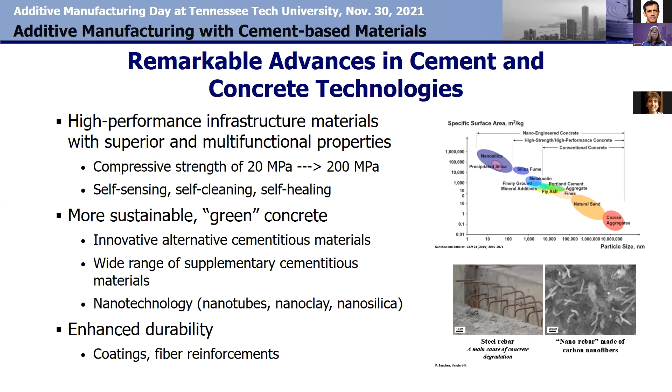So the question is: is 3D printing the next revolution for cement-based materials and the construction industry? 3D printing has received significant interest from the construction industry in the last few years. 3D printing eliminates the need for formwork. Molding and formwork represent 35 to 60% of the cost of a concrete structure. So 3D printing can reduce construction cost and time. It also eliminates time spent on rebar placement and inspection, and in turn can increase productivity and safety. And of course, it provides flexibility in construction and architectural freedom that cannot be obtained with traditional casting.

In addition, 3D printing also provides a more efficient use of materials. You can place material only where you need it, and that eliminates waste as well. So 3D printing can significantly reduce the large environmental footprint that is associated with construction. So these are the benefits for the construction industry.

But there is another aspect that is probably less evaluated, which is the new paradigm 3D printing provides for cement-based materials and design approaches. 3D printing has created a new opportunity for concrete to optimize the binder and to use other types of binders and local materials.

So 3D printing provides an opportunity for controlling locally the microstructure and the interface between the reinforcement and the materials, and also to realize a hierarchy of structures and patterns with much greater control over a broader range of length scales. So 3D printing provides the ability to design 3D printed elements that have tunable and unique or enhanced properties that are not achievable with current casting.

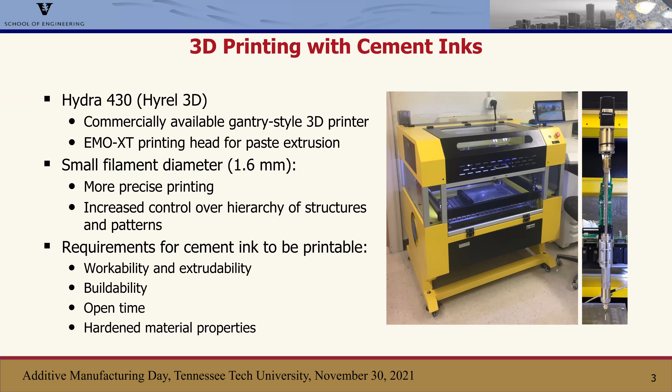While there are some downsides of this, the primary advantage is that it gives us more precise control over the printing process, allowing us to have more careful control over what material is placed where, for closer control of the hierarchy of the structures and the patterns that we're printing, so that we can use that information to more closely develop novel materials and printing processes.

I'm not going to go into too much detail about this because I know Dr. Biernacki's students have several talks talking about this, but it's important to understand that you can't just 3D print with any old cementitious material. It's important for it to be workable enough that you can use it to form filaments, and buildable enough that it can hold its own weight without deformation of successive layers, while also having enough open time so that it is in the fresh state long enough for you to extrude your structure. And then once it's printed, it also has to have adequate hardened material properties for whatever application is being used in the industry.

There are a couple considerations that are important to take into account when you're extruding a cementitious material, particularly with the propensity for it to segregate during the extrusion pressure. So there's a couple dynamic processes that occur during this process.

Water can be driven out of the extruded filament into a lubrication layer to facilitate plug flow, which can change the availability of water within the filament, while simultaneously you can be driving water from the bulk cement paste into the filament as it's printing, which can have a converse increase of the local water availability within an extruded filament.

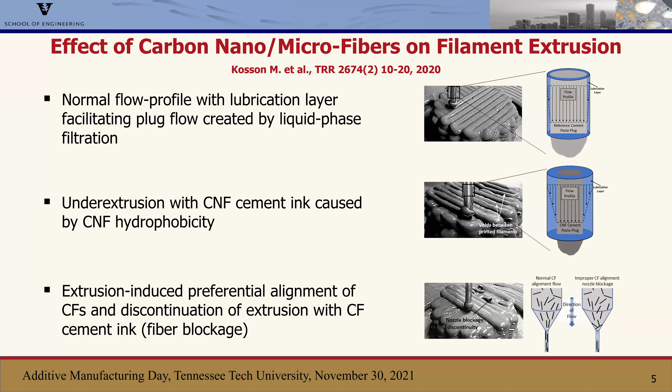When we were printing with the carbon microfibers, we saw that they preferentially extruded and aligned in the direction of extrusion, which, when we printed in a rectilinear pattern where every layer was offset 90 degrees from the previous layer, produced an effect where you had an alternating directionality of the printing pattern.

Interestingly, other than that, as we've tried to study the interface, there's no other obvious indicator that an interface is being crossed here. So there are only very minimal microstructural changes associated with the interface between these printed filaments.

Another important thing to consider was that we saw a non-uniform dispersion of the fibers throughout the filaments, and it's thought that as these fibers align or fail to align - but not quite enough to cause a blockage - you can have fibers that have a tendency to come out all at once.

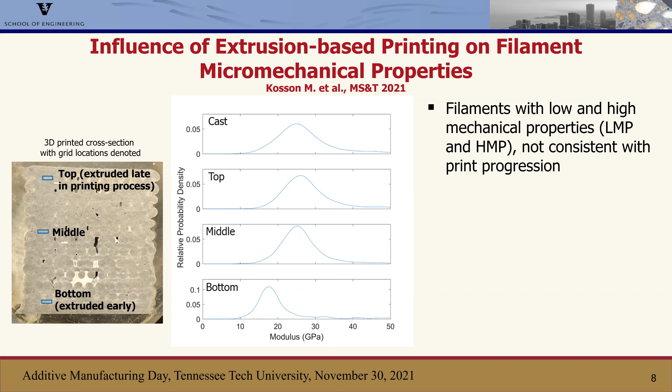So what we found is when we casted samples with different water to cement ratios, we got a similar effect, whereas a higher water to cement ratio corresponds to a reduction in the mechanical properties of the filaments as measured by nanoindentation. For the low mechanical property filaments, we get this similar effect to casting with a higher water to cement ratio, whereas with the high mechanical property filaments, we're getting something more similar to casting at a lower water to cement ratio.

That suggests that what we're seeing as we extrude is a big change in the availability of the water within the structures, and that's changing the mechanical properties of those filaments once they've been hardened.

As far as the effect of this on the microstructure, what we found is that there aren't big visible changes in the microstructure between these low mechanical property filaments and the high mechanical property filaments. That suggests that most of the changes are more at the nanoscale, in the pore structure, and in the packing density of the individual hydration products, as opposed to changes within the hydration reactions themselves.

We do see, however, some evidence of changes in the dissolution depending on the chemistry of the unhydrated particles. I'm not going to get too deep into that for this talk.

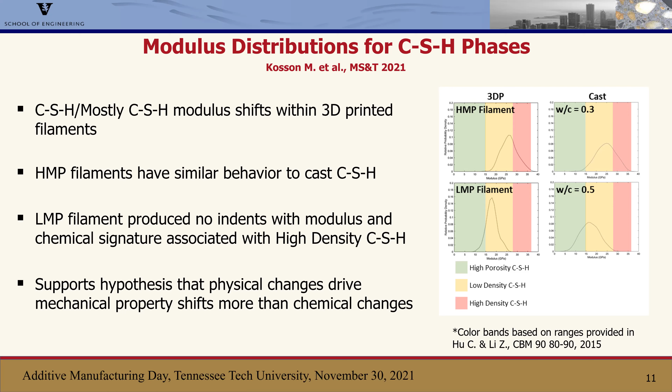So in conclusion, there are some very important things to take into account when printing with a small filament diameter, including that liquid phase filtration can change your local water availability at the extrusion point, and that these changes are dynamic and can change both the mechanical and chemical behavior of your printed filaments at multiple scales.

The interactions between the paste constituents during extrusion also need to be considered, as we saw with the carbon nanofiber hydrophobicity leading to under extrusion, and with the carbon microfibers aligning with the direction of the print, as well as water being transported through our filaments during printing.

What I want to leave you on is the thought that we can use these interactions to tune the mechanical properties of our structures for the specific application that we're using them for.

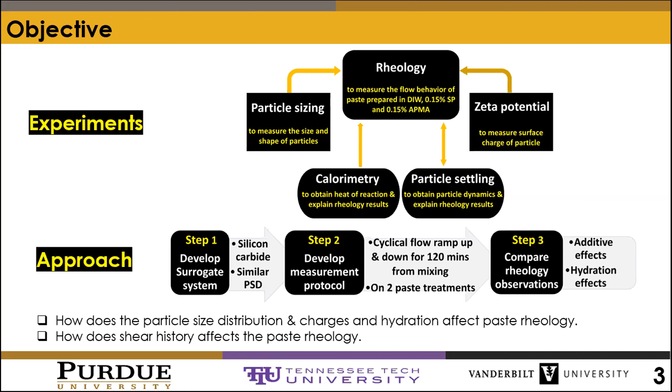I want to know how much of a factor hydration is in the first 120 minutes under shear conditions. So I'm trying to understand the effect of additives on rheology, and how much of rheology under flow conditions is contributed by hydration and how much is particulate driven.

So now let's discuss rheology even further. One way to study the flow of cement paste is through rotational rheometry, where a small thin film of material is placed between two parallel plates, and one of the plates is spun, usually the upper one. When you do that, you generate a flow curve, the plot of shear stress against shear rate. For a Newtonian fluid, regardless of whether one is increasing or decreasing that spinning rate, that fluid behaves exactly the same along a straight line.

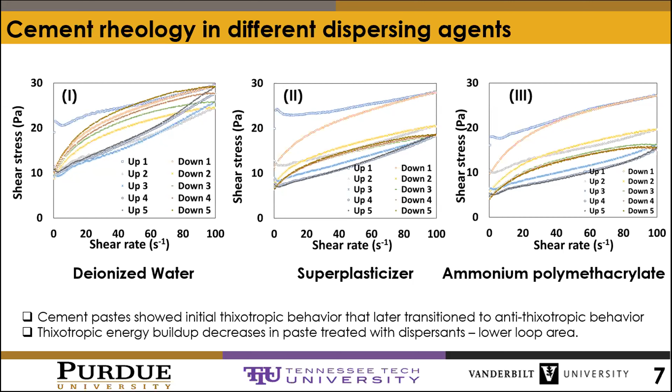So how does the particle size distribution and zeta potential measurement impact rheology? Dispersing agents do two things: modify the particle surface charges and the apparent particle size distribution. In fact, changing both in different directions may have competing impacts on rheology.

Secondly, while ammonium polymethacrylate clearly changes the surface charge in a direction that should favor deflocculation, in fact it doesn't, and the apparent particle size increases by more than double. Nonetheless, the rheology suggests that ammonium polymethacrylate has a lubricating effect, apparently. Once the paste begins to be sheared, it behaves as a flocculated material and transitions to anti-thixotropy.

Here I briefly compare the rheology of cement against that of silicon carbide. In the first 45 minutes of mixing, while cement paste transits from thixotropy to antithixotropy, silicon carbide paste transits from antithixotropy to an unstable mixed mode of thixotropic and antithixotropic behavior, attributed to their different initial conditions of structuration immediately after mixing. Also, results suggest that flow curves for cement paste in the ammonium polymethacrylate, wherein hydration is occurring, evolve to a similar value of shear stress when compared to the silicon carbide.

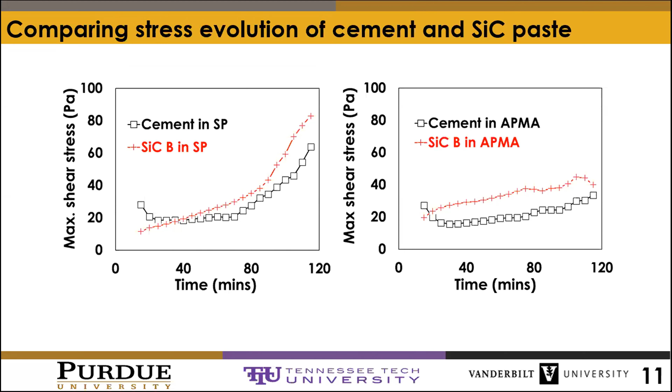Here is the maximum shear stress attained in each cycle loop against time for both pastes in the two liquid treatments. We see that both pastes evolve to similar shear stress values.

So what are the broad conclusions to be made in this study? The stable rheological condition of Portland cement paste under shear is antithixotropic, not thixotropic.

With the comparable rheology observation for non-reactive silicon carbide paste and reactive cement paste, it is difficult to suggest that changes in cement flow rheology in the first 120 minutes after mixing are the effect of hydration rather than particulate interaction.

And finally, although certain additives in dilute systems significantly alter the apparent particle size distribution of particles in suspension, that observation alone cannot be used to produce a predictable rheological outcome. Thank you.

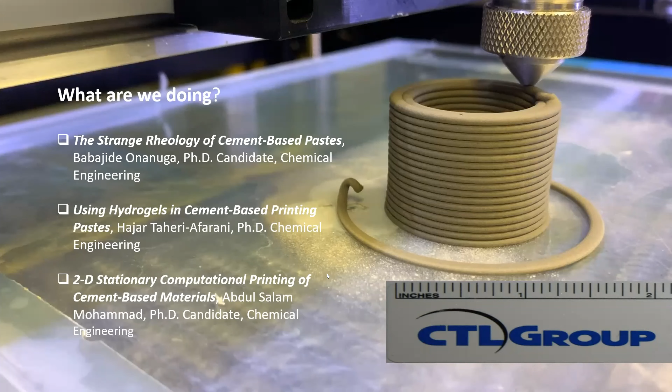Habitat for Humanity reports that 1.6 billion people live without adequate housing. So might additive manufacturing be a solution? The answer is yes. Researchers in the United States and abroad are actively working on additive manufacturing technology that might soon make it possible to house the world's growing population with affordable, adequate housing.

But yet, there are a number of critical hurdles. The material must be extrudable. It should be able to retain its shape once deposited. The deposited layers should not collapse under the load of subsequent layers, and a good bond strength between the layers must be ensured for better hardened properties.

Our results show that unadmixed cement paste is simply not printable. So what's the solution? The answer is additives or admixtures that can be added to the cement paste to make it printable.

We are searching for effective additives, and there are lots of candidates. There are traditional admixtures like superplasticizers or off-the-shelf viscosity modifying agents. People also use fillers like clays and limestones, and supplementary cementitious materials like ash, slag, and silica fume. There are also less traditional admixtures such as hydrogel forming polymers.

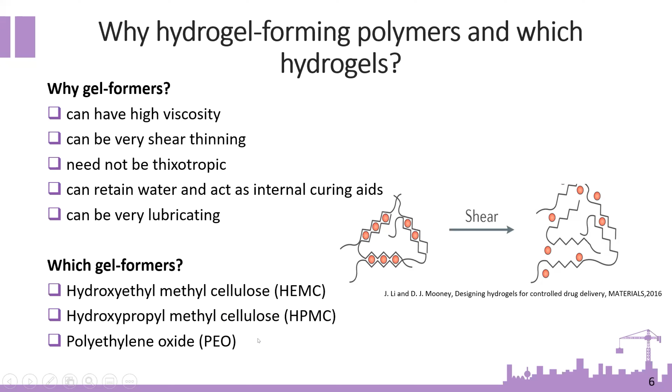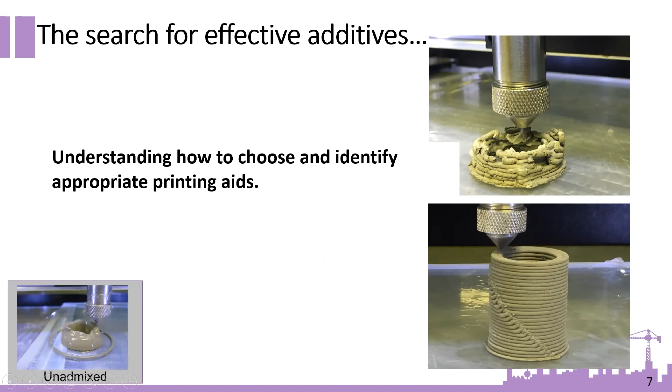Our experimental design included a 4x4x3 factorial design. We varied the gel to cement ratio, and also varied gel percent, and printed a benchmark hollow cylinder object based on 3 hydrogel forming polymers.

The viscosity improved and increased as we increased the gel concentration. We also performed oscillatory measurements of the hydrogels.

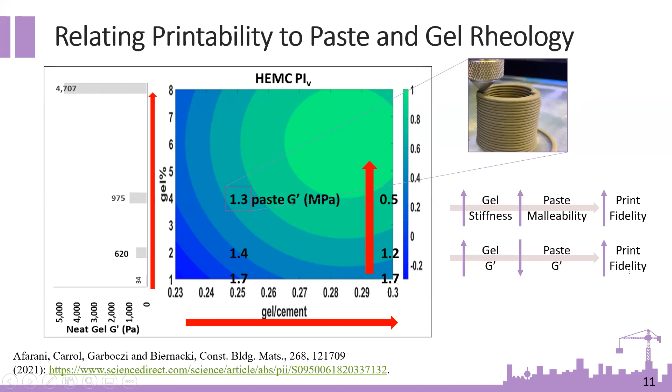So all in all, hydrogel forming polymers were found to transform unprintable neat cement paste into a highly robust printing media. The highest performing printing paste had malleable characteristics and retained rheologically solid-like behavior. Printability increased proportionally with increase in neat gel storage modulus, but was inversely proportional to the paste storage modulus. By increasing the gel concentration, the stiffness of the gel increased, which increased paste malleability, and ultimately print fidelity increased. Thank you for your presentation.

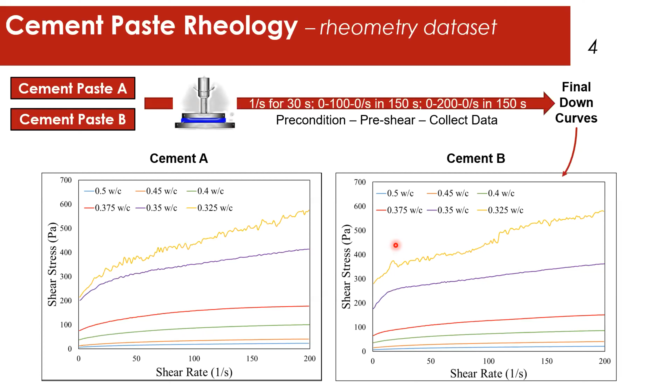I then fit that data set with either a Bingham model or a Herschel-Bulkley model, and I get beautiful fits with the Herschel-Bulkley model for most cases, except for maybe this one case where it was a rather stiff paste and it turned out to be Bingham rather than Herschel-Bulkley.

That being said, I collect these experimental data in triplicate, and I determine the yield stress, plastic viscosity, and the fit exponent for both cement paste A and B.

Bottom line is, when I plot yield stress versus water to cement ratio, I see these two beautiful curves with the aging effect. If we age for 30 minutes, the material is rather stiffer than the material that is not aged. However, for water to cement ratio above 0.4, there is really no effect of aging for a period of at least 30 minutes.

So what I've already done is make the paste, do the flow rheology, and extract the yield stress, plastic viscosity, and the dimensionless fit parameter for the Herschel-Bulkley model. But to understand how the rheology of cement paste works, a good test is to do a slump flow test.

The slump cone is a simple device. It is conical, filled with the cement paste, and the cone is lifted such that the cement paste slumps under gravity.

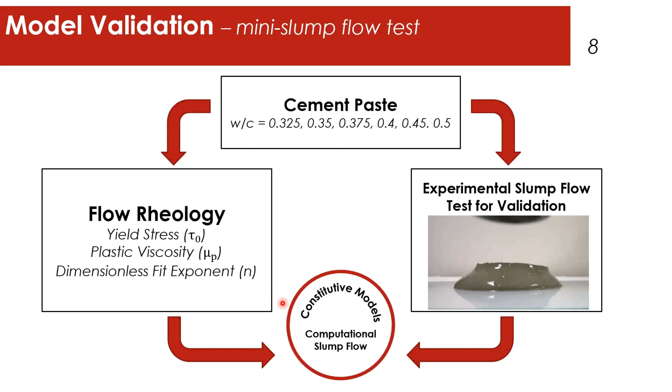Here is the comparison of experimental and simulation results of the mini slump flow test, from 0.325 water to cement ratio all the way up to 0.5, that are in good agreement with the experimental results.

Now I need to compare the 3D printed object to see if I can actually predict the morphology of the printed objects, instead of just the slump cone.

So I prepared our paste, again both paste A and B, and I printed an object that is a double wall hollow cylinder. On the other pathway, I'm doing 2D stationary computational printing, and then I'm going to bring them together for comparative analysis.

These are the actual objects that I printed, which are very small, on the order of 27 millimeters tall by 36 millimeters in diameter.

I show a range of objects here from 0.3 to 0.375 water to cement ratio, some printed and some collapsed in between. If I go to water to cement ratio as high as 0.4 to 0.5, the cement paste slumps completely and it won't print at all.

That being said, the question is how can I move from modeling a single gob of material to actually modeling printing? So imagine you can only see what happens in this plane AA, which is just slicing through some bit of space where the printer is going to pass periodically every now and then.

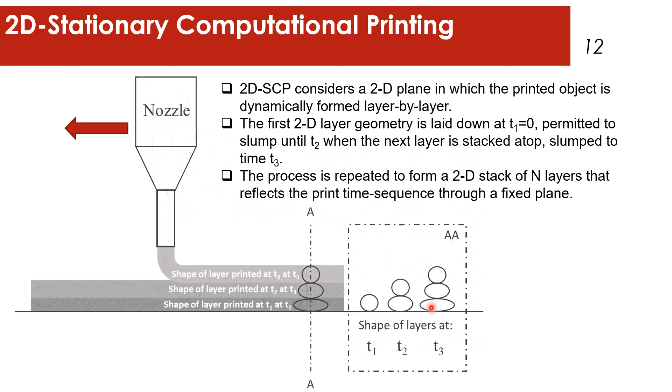At time T2, the second layer deposits such that at T3 minus T2, not only will the upper layer slump on itself, but the bottom layer will slump under the weight of the upper layer. At time T3, the printer passes again and deposits the third layer, and so on.

Now I have prepared a video that shows how this happens computationally. What I'm not doing here is piling up a bunch of layers at time t equals 0 and then slumping all of them together. That's not what this is.

So these are the stack of layers that are going to print a double wall, because we are printing a double wall hollow cylinder. The printer is passing the outer layer and the inner layer, and the material is wicking and slumping into it.

I selected a particular object here that will fail at some point, because I wanted you to see that this 2D technique, although two-dimensional and computationally very efficient, can actually capture the dynamics of a failure. In a bit, you will see a collapse of the wall.

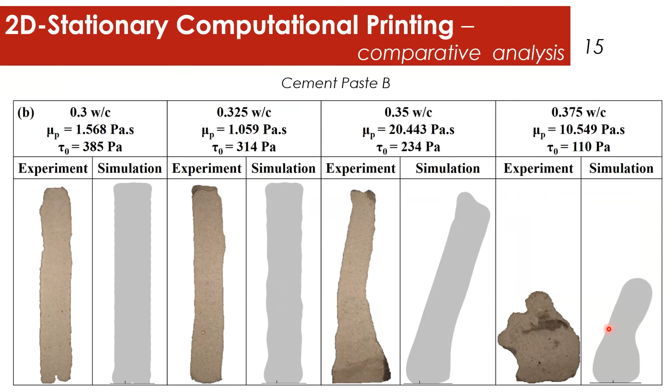So here is the collapse of the wall. Here you see the comparison of cut cross section of actual printed object and computationally printed object, which are in good agreement for cement paste A, as well as for cement paste B. At high water to cement ratio, computationally printed object also predicted the collapse or failure similar to actual printed object.

Now to establish a more quantitative comparison between the model-based prints and actual printed objects, a 2D cross-section based print fidelity index was calculated by overlapping the actual printed object or computationally printed object with the idealized object. So this is an idealized object and this is a computationally printed object.

So first I align the basal plane and then I align the axial centroid. I penalized for anything that is outside the idealized object and anything that is not covered inside the idealized object, and measured the print fidelity index from 0 to 1, where 0 is worst or not printed at all and 1 is the perfect object that matches the idealized object.

So here I plotted the print index of actual printed object on the yield stress versus water to cement ratio graph. And you see that as the water to cement ratio decreases, the yield stress increases and the printability increases. Thus, the printability moves from low print fidelity domain to a high print fidelity domain as the paste water to cement ratio decreases and the yield stress increases.

Now, if I plot the model and actual print index 1-on-1, I see a strong near linear relation. And if I put the yield stress on it, I see that the good printing outcome was observed at the printability index of 0.7 or greater. So this shows that at printability index of 0.7 or greater, that is a yield stress of about greater than or equal to 237 Pascal is required to produce good printing outcomes.

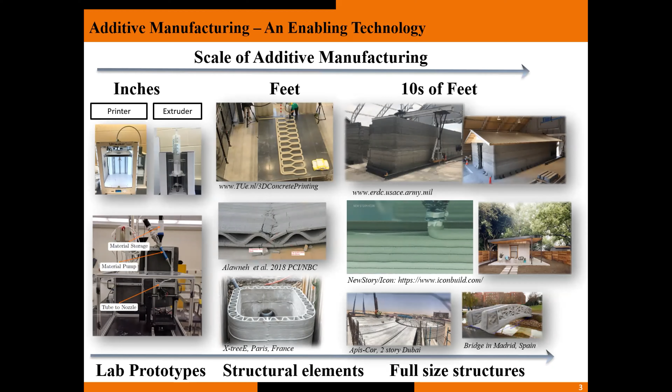So about 2016, as mentioned by Professor Sanchez, collaborative research started together with Tennessee Tech and Vanderbilt University, Professor Sanchez and Professor Biernacki, in which we touched on a number of different topics. As you know, additive manufacturing has been around now for a while, and it exists across multiple scales. Early on at the smaller scale and prototyping, and later on towards more structural elements and components, and then more recently towards full-size structures for home building, but also for renewable energies.

But there are several aspects that it's a multidisciplinary, multifaceted topic. And so on one side, we worked on the design opportunities, ability to print materials in different shapes and forms, whether in terms of exterior topologies or interior architectures, enables you to achieve compliant mechanisms like that. But there are also challenges, as was discussed by Michael earlier, in terms of the heterogeneities that results from these layer interfaces. So we looked at some of the microstructural aspects.

In terms of materials rheology, the past two presentations covered interesting work on the rheological challenges of formulating materials and failures. And on the fracture side, once you have a structure, then you have to worry about the fracture and damage mechanisms in these systems. So early on, we focused on design opportunities, combining really materials and space. In a monolithic material, you're dealing with inherent properties of the material.

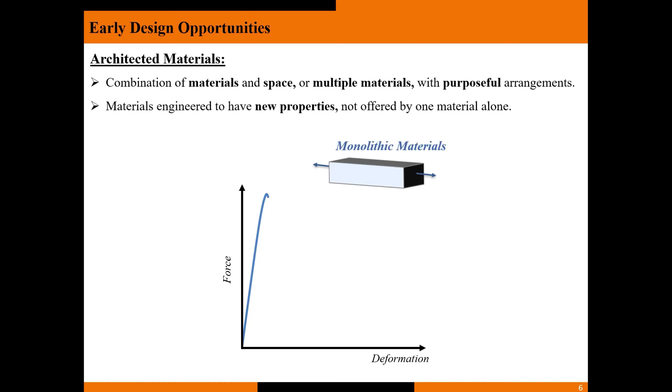You apply the force in a brittle system, the material fails. In an architected material, you have the ability to tune the response by tuning the architecture and perhaps improve some of the properties. So we looked into a number of different architectures, but more specifically I'm going to briefly talk about these Bouligand and helical architectures, in which as you deposit the materials in a layer by layer fashion, you continue to rotate the orientation.

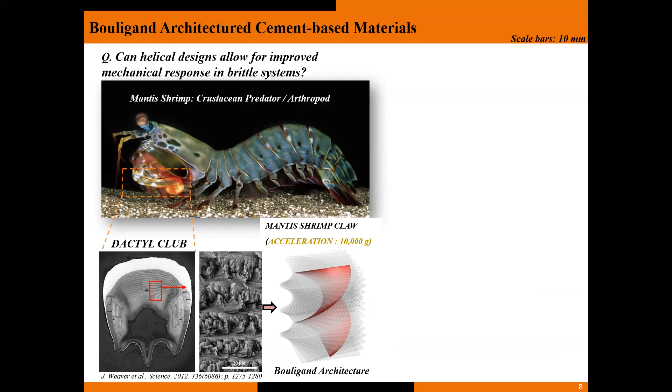Inspired by mantis shrimp, and the dactyl club more specifically, we looked into the role of pitch angle, or the rotation angle at which you orient the filaments in the subsequent layers, to see if we can investigate the design parameters, and can we fabricate them, and can we characterize them in terms of their tensile properties.

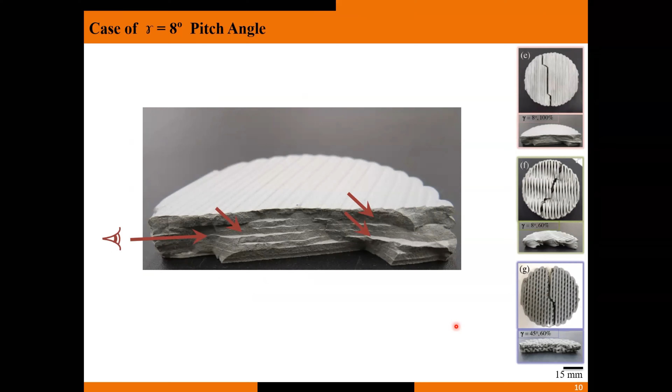So if you look at this structure, this element that has an 8-degree pitch angle, in this orientation what you find is that there are two toughening mechanisms that contributed to improve toughness in these solid systems, one of which is crack deflection at the interface and subsequent interfacial cracking. There was also an overall crack twisting, which is challenging to trigger in a brittle system, that we also observed.

So together we inferred that controlling the architecture and tapping on the challenge of weakening interface, you could combine them together to improve material properties.

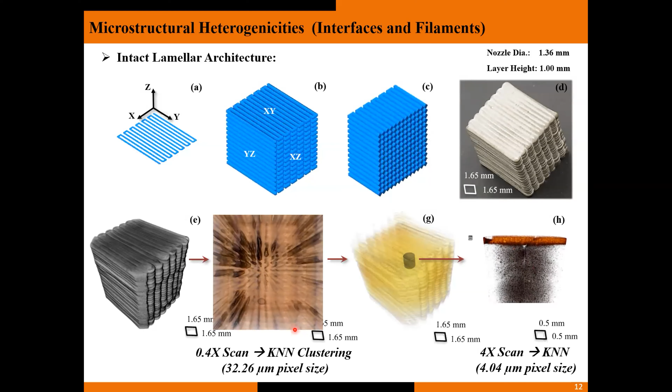In terms of going back to the microstructural heterogeneities, we looked into the microstructure of 3D printed cement paste at two different scales, at about 30 and 4 micron resolution. What we found was that there are macropores that happen throughout the printing process due to inconsistency, but there are also microchannels that are essentially trapped air in between the filaments.

There are two other discoveries that we had, in terms of filament rearrangements from a straight path, but also these bright regions, which later we found through a smaller scale characterization are nothing but accumulation of higher degrees of unhydrated cement grains near the pores, near the microchannels.

And so we clearly understood there is a homogeneous core versus a porous interface. So we looked into a smaller scale resolution, and what we found was that these microchannels are actually connected to one another in micropores, which was evidence for the presence of a weak interface.

And then we also noticed the rearrangement from some type of a diamond shape microchannel to a triangular shape, which is visible in the video.

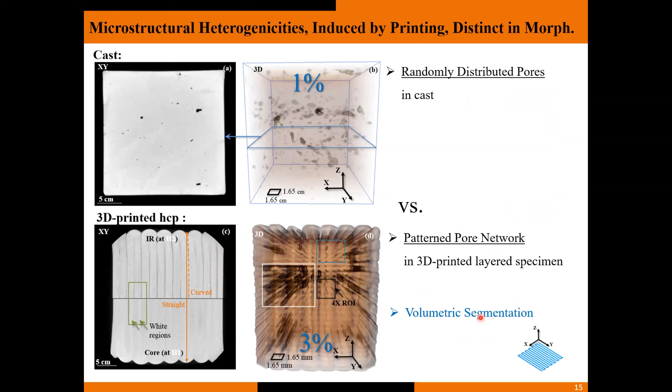So we later quantified these using a method called KNN clustering, and compared them to the reference cast. The 3D printed samples typically not only had higher degrees of porosity volumetrically, but when we did the segmentation we noticed that the arrangement or the morphologies are also fundamentally different.

As you can see here, the porosity induced by printing is distinct in the 3D printed samples. We have macropores, microchannels, and micropores, whereas in the cast case you have a continuous spectrum of porosity.

Then we focus on the damage mechanisms in these samples. In cast, there was no distinct crack pattern, just localization of a crack in the form of a shear cone, as opposed to a helical architecture, where we observed numerous microcracking at the interface and a helical exterior crack pattern.

So in other words, we were able to distribute the microcracking similar to those we observed in the flexural test, but here we're looking into compression, which we later found helped also improve the toughness of the material, the intrinsic toughness of the material, compared to the cast counterparts.

The graph right here is comparing the area under the curve between the cast and the Bouligand architectures.

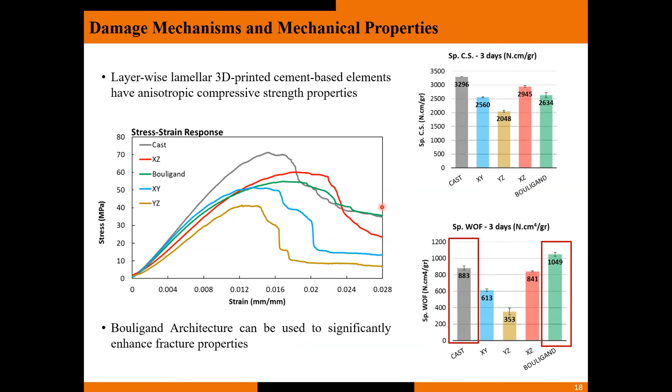The last part of the talk I would like to focus on is the rheology and buildability. Much of that was broadly discussed in the past two presentations. There are two main failure mechanisms with 3D printing of soft materials: buckling at the lower layers, yielding at the lower layers, as opposed to buckling in the top layers.

What happens is that from accumulation of geometrical imperfections, as was shown in the previous work, you typically end up with additional bending moments and accumulation of eccentricity, which then leads to local buckling and then global buckling. The question is, which rheological property is responsible for buckling specifically?

You first have to overcome extrudability, then you have to overcome the yielding at the lower layers. Once you're able to print an object, buckling is typically the common failure mechanism. So it's important to identify what rheological properties need to be controlled.

For that, we looked into the correlations of buildability of hollow cylinders with different rheological properties. We found that all three shear moduli associated with elastic properties or stiffness, G, G star, and G prime, demonstrated a stronger correlation with buildability as opposed to yield stress and G double prime. In other words, buckling in 3D printed soft materials is mainly dependent upon stiffness.

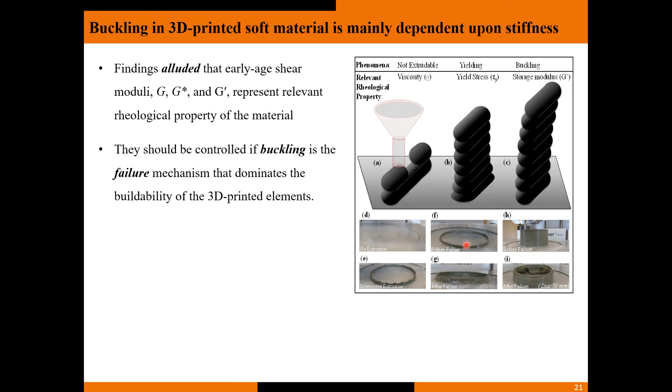As you can see here, viscosity essentially controls the ability to extrude. Yielding controls the ability to avoid yielding failure. Once you build up, you really should be looking into the storage modulus or complex modulus to control buckling.

Although these properties are interrelated, it's an important distinction as we scale up the processes in construction as a means to tune the chemical characteristics of surfactants and other chemical admixtures specifically for 3D printing.

We also looked at an isosceles triangle as a means to come up with a quantitative way to assess the deflection of single filaments. The test helped us look at the ability to span over varied length and helped characterize the amount of deformation.

In a neat cement paste as opposed to a cement paste with high range water reducing admixtures and viscosity modifying admixtures, which were all quantified using micro CT.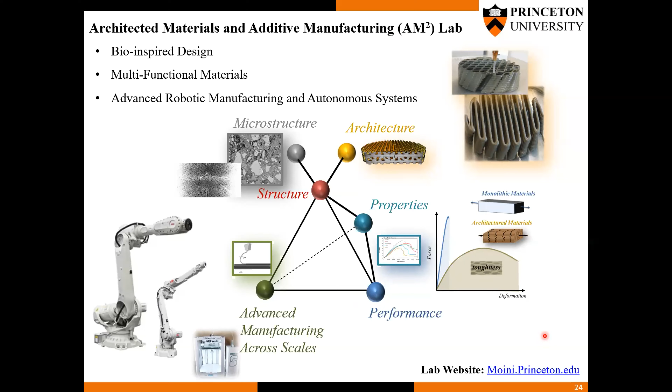Going forward, my lab works on a number of different areas: bio-inspired designs, multifunctional materials, and will continue to advance robotic manufacturing and autonomous systems.

Here are some of the more recent activities we've had in the lab with 3D printing concrete at larger scale, Bouligand architectures, and cellulose. Some of the ongoing research projects going forward are really looking into some of the durability issues and fracture issues that have been overlooked. Hopefully we can contribute to some of those aspects for the community, but also looking into some of the polymer additives for 3D printing cement-based materials.

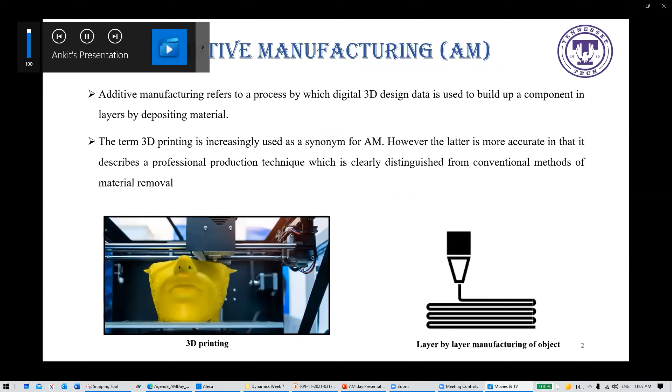So let me discuss something about composite material as well. Composite material is just a combination of two or more materials to get good properties, better than the individual components. How do these two materials mix? They generally don't dissolve; they just merge together completely to get high strength, high stiffness, and combined low density.

Now let me discuss fiber reinforced additive manufacturing. This is the technology I used for creating the dentures. I discussed additive manufacturing and composite material with you. So what I did in my research is combine these two technologies. I took the flexibility of additive manufacturing, I took the advantages of composite material, I combined them and created the composite dentures.

We all know a single material cannot fulfill the needs of all applications, so we have to do composite printing. For those applications, fiber reinforced additive manufacturing comes into the picture, and I used that for creating the composite dentures.

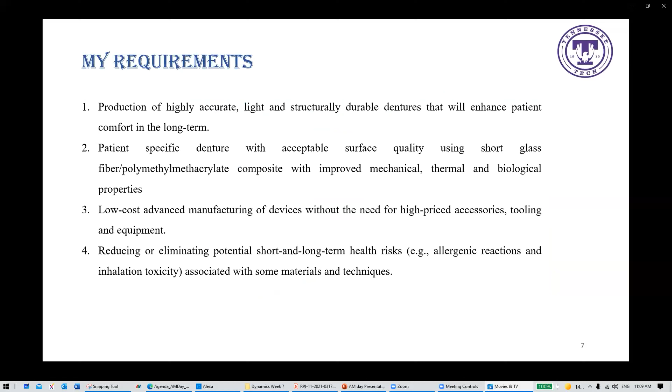There are some requirements I set for creating those dentures. The denture produced should be highly accurate, lightweight, and structurally durable. The surface quality should be very good with improved clinical properties, meaning mechanical, thermal, and biological properties. It should be low cost because it should be affordable by any patient, and it should reduce and eliminate the short and long-term health risks.

Let me start the procedure of how I created the composite dentures. For creating the composite denture, I created my own material, my own composite filament. The benefit of creating our own filament is that you can create it in a very cheap way, and you can also control the fiber behavior.

You can control the fiber length, the fiber distribution, the fiber breakage. You can play with those things, because fiber behavior is very important in judging the final clinical performance of the composite dentures. Now I will discuss how I created those composite dentures, the composite filament.

First I took two different materials, short glass fibers and PMMA pellets, for my research. Then I dried them in a furnace for 7 to 8 hours to get rid of the moisture. Then I poured them into the extruder to create a uniform diameter composite filament for the composite denture production, and to use inside the 3D printer.

So I created the composite filament. Now I have to check whether the two materials I took to create the composite filament are compatible with each other or not. Should I go with those two materials for creating the composite dentures or not?

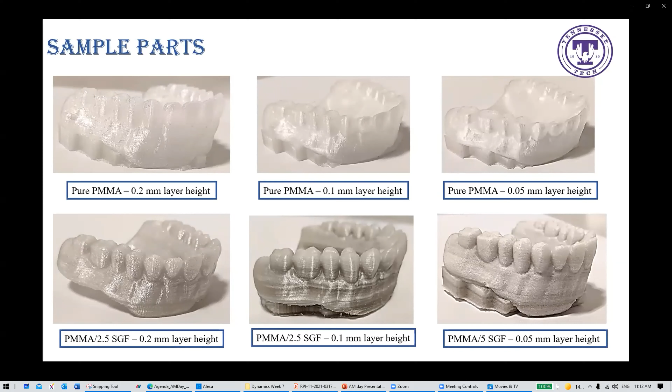This is the way I printed the composite dentures. I printed the dentures all in the vertical direction in order to avoid the support material. Because if you're not printing support materials, you are saving material and ultimately saving cost, getting low-cost composite dentures. So I printed all the dentures in the vertical height.

Now I want to discuss research outcomes with you. I am creating composite dentures that have to be used in the mouth. This patient has to use them in the mouth, and he has to bite as well, biting food with those dentures.

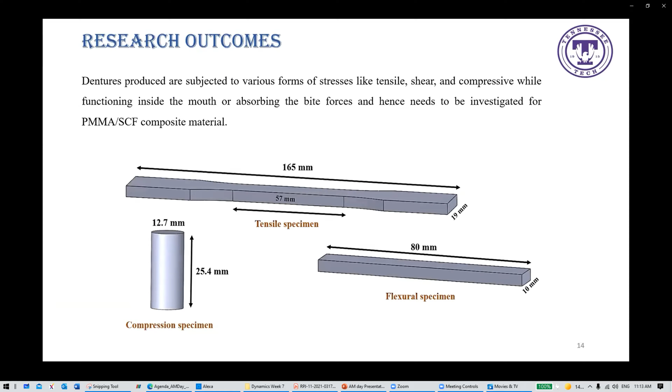There are various forms of stresses that occur while chewing: tensile, shear, and compressive. Accordingly, I tested all the properties and strengths, like tensile strength, flexural strength, and compressive strength, to check the final clinical performance of the dentures.

I did some tensile property analysis. The maximum tensile strength I got is 73 megapascal, which is more than the standard requirement for any denture available in the market.

Then I did some flexural analysis. The maximum strength I got is 151, which is twice the standard requirement for dentures.

Then I did some compression analysis. The maximum I got is 93 megapascal, which is higher than the standard requirement for dentures available in the market.

Now the surface roughness - I told you we are creating composite dentures. It should be of high strength and good surface quality. Surface quality is important because we don't want it to create discomfort in the mouth of the patient.

The main reason for our research in creating the dentures is the cost. We have to create affordable dentures. So accordingly, I did some cost analysis, time analysis, and weight analysis. As you can see from the data, the cost of the dentures created by the low cost desktop 3D printer is $1 to $2, and the weight varies from 17 to 20 grams, which is very, very low.

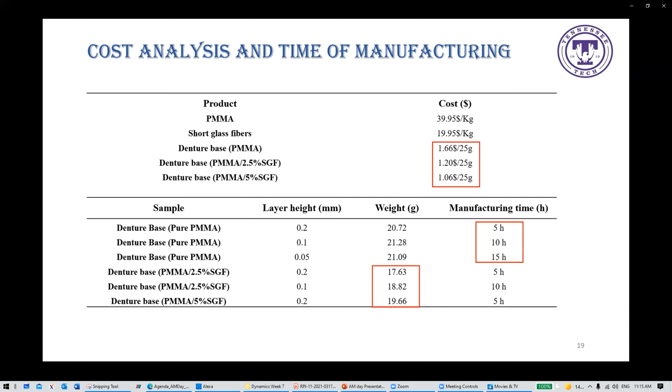So here I can conclude that the dentures we produce from the low cost desktop 3D printer save 60% of the weight compared to dentures available in the market, and we got a 92% reduction in cost compared to dentures available in the market.

In conclusion, the dentures produced are highly accurate, affordable, lightweight, and structurally durable. The dentures produced are of good quality with improved clinical performance.

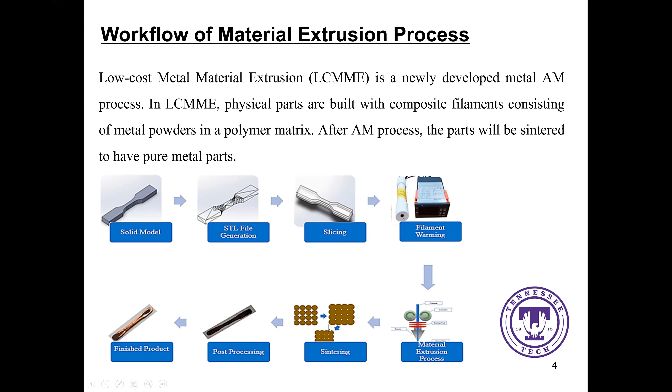But after the 3D printing, we have a sintering process. After the sintering process, the final part is a pure metal. For example, in this research, we use a bronze PLA material to do the manufacturing.

The first step is the STL file generated on SolidWorks, and we get the G code to do the 3D printing in the middle. This is a non-sintered part, a mixture of bronze and PLA. After the sintering process, the final part is pure bronze. The PLA melts out during the sintering process.

This is a sketch of the sintering process. We see the metal powders melting in a plastic matrix. We increase the temperature from room temperature to a sintering temperature, which is a little lower than the melting temperature of the metal. For example, the melting temperature of bronze is 900 degrees Celsius, so our sintering temperature is around 890 degrees Celsius, just a little lower.

In this process, the plastic melts out and the metal powders gather together to form the final part, which is pure metal. But at the end, the final part has some internal void. This cannot be avoided.

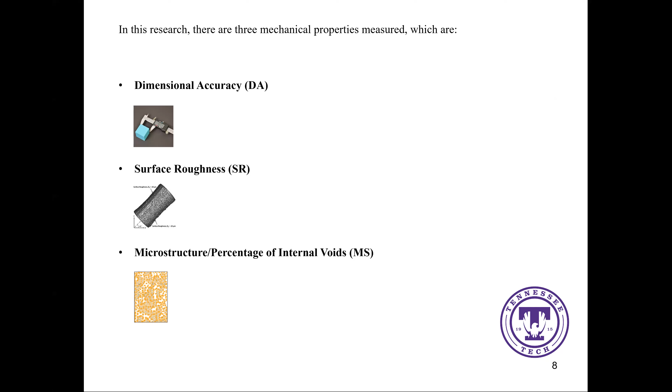The dimensional accuracy is the shrink ratio of the final parts compared with the design parts. For surface roughness, we use RA numbers because it's the most widely used metric, measured by an SJ-210 surface roughness tester. For the microstructure, we compare the theoretical mass and the real mass; the difference between them is the percentage of internal void, because the void does not have any mass.

Before the manufacturing process, we could use machine learning to do predictions on the final results after manufacturing, to change our manufacturing parameters and achieve good quality final parts. Two machine learning algorithms are used in this research: support vector regression and neural network. In the neural network, we have multiple hidden layers, so it's a deep neural network.

So small bias, small variance, it's a good fit. It's not overfitting, not underfitting. We have a suitable number of data points to do the prediction.

For the evaluation metric of the results, we use mean square error. The mean square error of the machine learning predictions on dimensional accuracy and microstructure is almost 0, meaning it's accurate enough for real world applications.

However, for the surface roughness predictions, it's not that good. So in the next step, what we want to do is minimize this mean square error of the surface roughness predictions by machine learning.

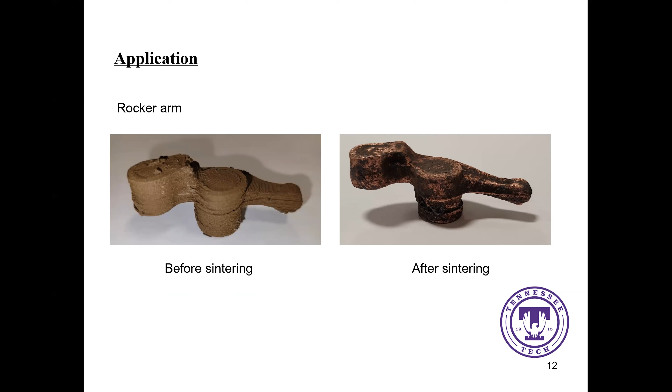This is a very new technique, so it does not have any applications yet. Our group generated a rocker arm for a car engine. On the left is the non-sintered part after 3D printing, and on the right is the final part after sintering. This is very hard and applicable in the car engine, meaning this technique is applicable in the real world.

In conclusion: first, preliminary research has shown that low-cost metal material extrusion could be used in the manufacturing process. Second, the dimensional accuracy and percentage of internal void predictions by machine learning are accurate enough for real-world applications. And third, by using response surface methodology, we could find the most suitable manufacturing parameters to get good quality final results.

I'd like to thank the Additive Manufacturing Research and Innovation Laboratory of Tennessee Technological University and my team.

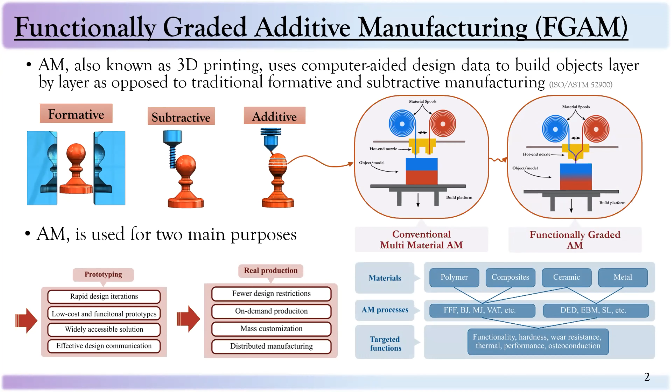So let's briefly talk about what FGM is. Functionally graded materials are advanced engineering materials that present complex, spatially varying material properties. Functionally graded materials occur in nature as bones and teeth, where nature designs these materials to meet their expected service requirements. This idea is emulated from nature to solve engineering problems.

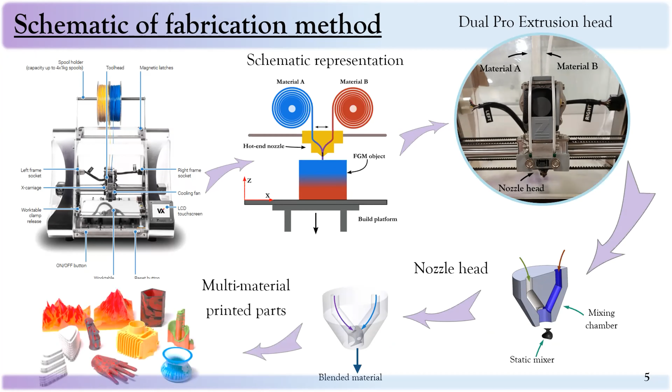This is a case study performed on a mounting bracket, a part fabricated by FFF technology with neat ABS and fiber-reinforced ABS materials.

We performed a numerical analysis first to identify the distribution of stresses under tension and compression loads. First, CAD geometry was created using SolidWorks software and then imported into ANSYS to perform static structural analysis, which will help us perform topology optimization.

However, before performing this analysis, we need to define material properties for the entire part, which we'll talk about in the next slides. Then material distribution was found using the ANSYS topology optimization module. Next, we performed voxel design and segmentation for the geometry, gradient design, and tool path generation. At the end, the part is ready for mechanical testing.

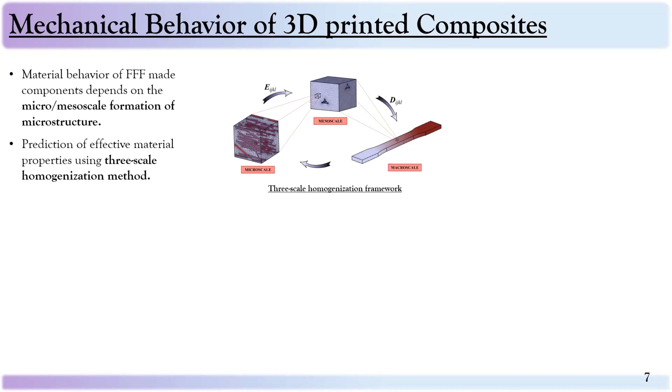So, let's go back to see how we obtain effective properties of 3D printed composite parts. We perform a 3-scale homogenization approach to get effective material properties for ABS and carbon fiber reinforced ABS material. The first scale is the micro scale, consisting of short carbon fibers and ABS matrix domain. Then the mesoscale, which has interbead shapes and interbead voids created during the layer by layer deposition process. Then the macro scale, a specimen geometry with gradient transition between materials was used in this research.

You can see the microstructural description here, which leads us to perform a homogenization process using RVE, the representative volume element method. You can see the direction of fibers changes on the 0 and 90 layup direction. This enables us to perform a homogenization process to get an effective property for neat ABS and carbon fiber reinforced ABS materials.

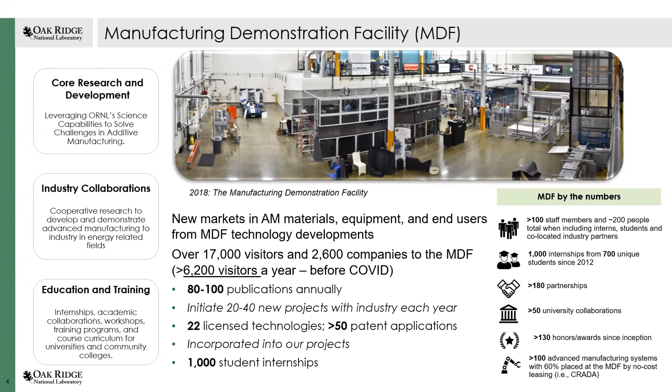For MDF, we started with the electron beam melting machine in 2014, and then extended to all the AM machines, like laser powder bed, binder jets, large scale arc welding, large scale laser metal welding, and then polymers, composites, and other kinds of parts. So recently we have large scale metal AM.

It's called Medusa, having 3 robotic arms, which is designed to make parts a lot faster and have better accuracy.

We have cross-cutting scientific disciplines: large-scale metals, metal powders, polymers and composites, and hybrid AM, meaning additive manufacturing plus subtractive manufacturing. So all these advanced manufacturing efforts we are working on to make a closed loop system by integrating materials, simulation, data analytics, characterizations, and system controls.

Each of these sections has many staff members working on them, and the development and research is spread to and applied across other systems.

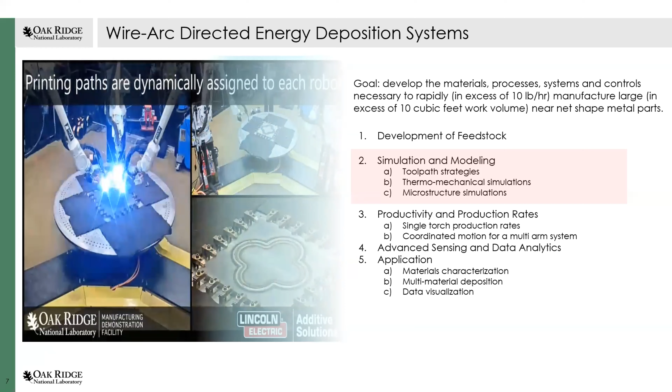This is the Medusa system, which has 3 robot arms. Our goal is to print rapidly, because a large part takes a really long time—even in certain cases a month or a couple of weeks to complete the printing. So we need a really fast printing speed.

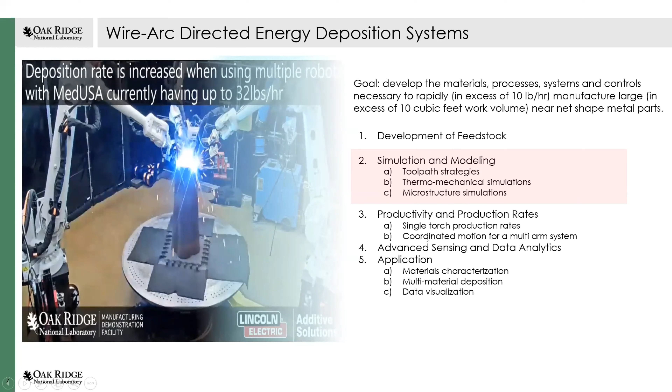Also, a large part means there are a lot of problems with distortion and deformation, as well as mechanical properties. So we want to guarantee part quality by improving all the system aspects. For that, we need feedstock development, simulation modeling, toolpath strategies, mechanical simulations, and microstructure simulation to guarantee properties.

For productivity and production rate, we need things much faster than a single torch—3 robot arms can make it a couple of times faster in ideal cases. We also use sensors and data analytics, for example IR cameras and speed cameras, and we apply machine learning for this effort.

Applications include characterization and multi-material deposition, since it has 3 feeders, so we can do multi-materials easily, along with data visualizations.

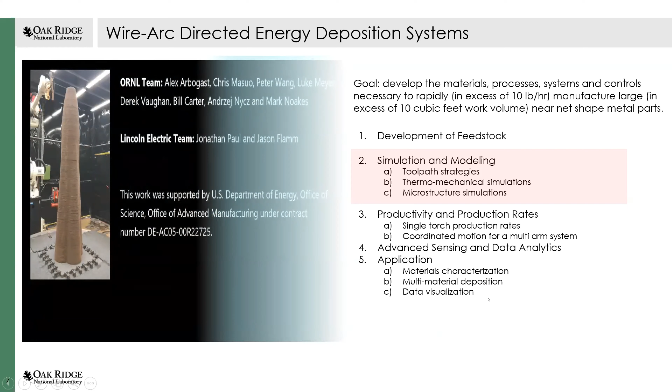We also did modeling efforts, and our model is heavily validated with simulation—comparing laser scanned experimental data with predictions, and it's a pretty good match. We also have neutron measurements compared in parallel with the simulations, both qualitatively and quantitatively at various locations. Those results are pretty good.

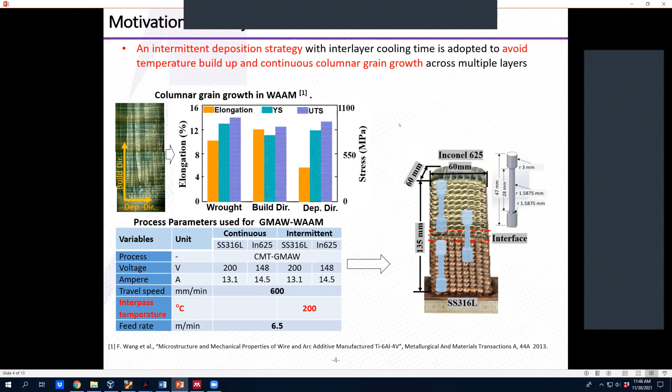For this strategy, during deposition of successive layers, we allow the previous layer to cool down to an interpass temperature. Through trial and error, we've found that 200°C interpass temperature works best for this approach.

Here are the EBSD grain maps showing the grain sizes and grain transition as a result of the intermittent deposition strategy. We worked on two materials, stainless steel and Inconel. In both cases, the columnar grains are merging into fine equiaxed grains - a phenomenon generally called columnar to equiaxed transition.

We see that the fine grain region for both materials shows almost equiaxed morphology, and the grain size varies between the columnar grain region and the fine grain region.

The first question is: where are these fine grains forming, and then how are these fine grains forming in the WAAM process with the intermittent deposition strategy?

To figure out the location of the fine grains, we took hardness plots at different locations across the layer interface, and found that the region right below a layer interface shows the highest hardness. From the grain size maps, we know there are fine grain regions there, so we're relating the high hardness region with the fine grain regions.

From the hardness map, we conclude that the fine grains are forming right below the layer interface.

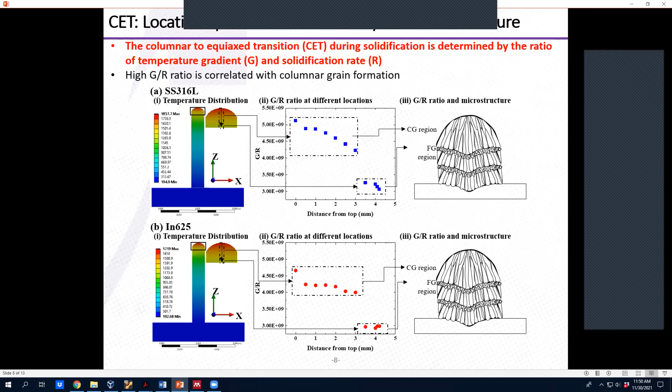So with this, we also tried to investigate the effect of grain size heterogeneity on the local deformation behavior. For that, we performed digital image correlation analysis, and we saw for both materials, under uniaxial tensile test, there was a difference of local strain showing periodic regions of high and low local strain.

We took local strain gauges in the fine grain region and columnar grain region, and found that in both materials, the fine grain region shows low local strain and also a higher work hardening rate, which we relate to the Hall-Petch effect or grain boundary strengthening due to the grain size in the fine grain region.

After figuring out the deformation mechanisms, we also compared the results or mechanical performance with the continuous deposition or continuous columnar growth regions. For both materials, with the intermittent deposition strategy or alternating grain size, we achieved improved mechanical performance in all cases compared to columnar grain growth cases.

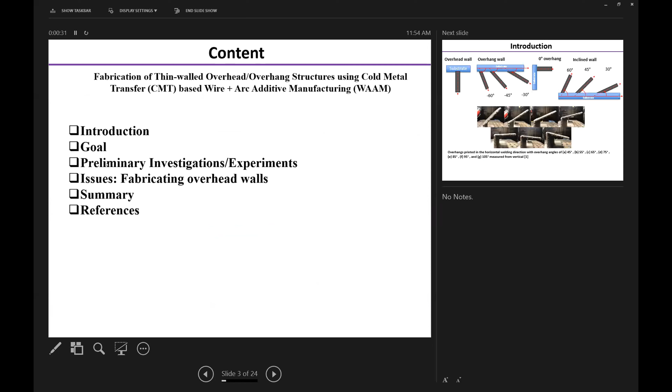This figure shows the various types of structures. The first is the overhead wall structure, where the substrate will be there and the structure will be deposited in the upside down direction. Then in overhang, this wall will be at some angle inclined to the horizontal direction or center line of the substrate.

Then in overhang direction, the build direction will be parallel to the horizontal direction. In an incline wall, the substrate will be horizontal and the wall will make an angle, with the build direction vertically upward. These are some structures fabricated at different angles using metal additive manufacturing.

My main focus is to manufacture overhang and overhead structures using CMT based wire arc additive manufacturing, where the cold metal transfer technology is used.

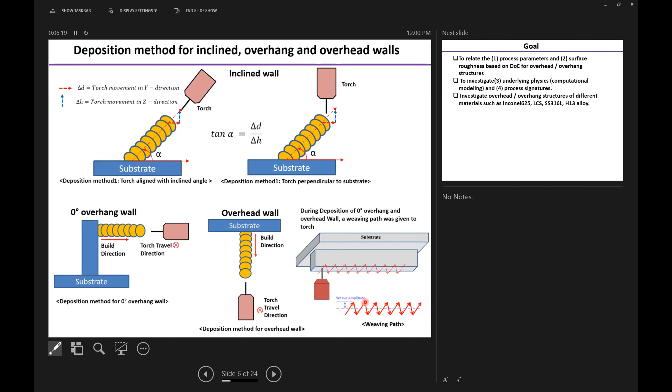Dwell time is the time for which the torch is staying at the extreme points, like this and this. That is the time for which the torch is remaining there, which may be 0.1 second, 0.5 second, and so on.

So the goal of our research is to relate the process parameters and the surface roughness based on DOE for overhang and overhead structures. The second goal is to investigate the underlying physics and the process signature. The third goal is to investigate overhang structures of different materials such as Inconel, low carbon steel, SS316, and H13 alloy.

For this we use this setup, the cold metal transfer based WAAM system. It consists of a wire feeder, CMT power source, the welding robot controlled by a robot controller, the welding table on which the welding substrate is mounted, and the Miller Insight Arc Agent that is used for acquiring data such as arc current, arc voltage, and wire feed rate, etc.

Then we also have an IR pyrometer used for measuring the temperature, and a machine vision system to record videos during the deposition process. We have an HDR camera, a high speed imaging setup, and a thermal imaging setup also.

Now I will go through some inclined walls that we have deposited at our lab. We started with a 30-degree incline wall, using SS316L material, Inconel 625, and H13 alloy. These are some images, inner and outer surface images of these structures. Here we used a wire feed rate to travel speed ratio of 9.28.

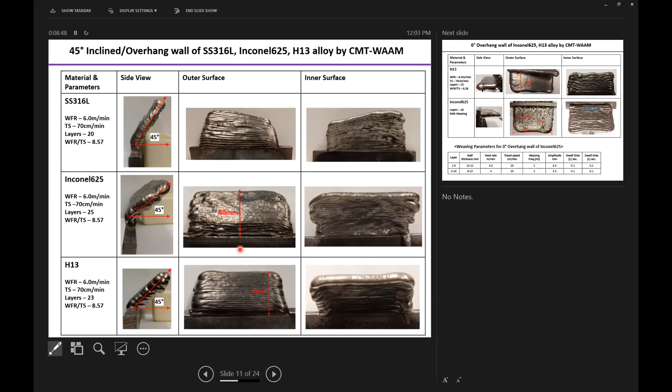Then we deposited the 0-degree overhang wall of the H13 alloy with the wire feed to travel speed ratio of 9.28. And for depositing overhang wall of Inconel 625, we used the weaving tool path because we were not able to deposit with the regular tool path.

Now after that we started with deposition of overhead wall. So here we can see the SS overhead wall of SS316L. These are the various deposition parameters, with a feed rate started for the first layer at 2.9 and the travel speed of 15. So we use the weaving tool path, because without weaving, after 2 to 3 layers, humping defect was forming, and due to that we were not able to make a wall of good height.

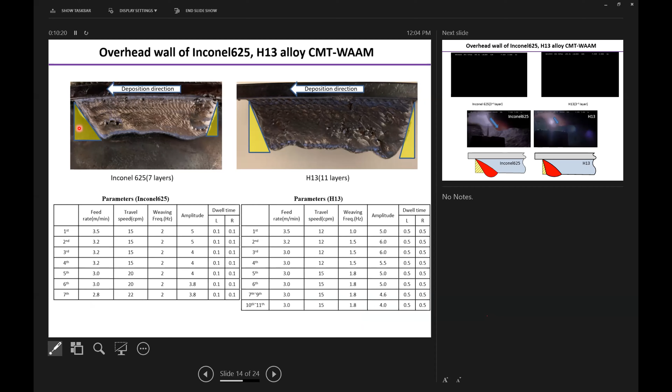So that's why we use the weaving path for tool movement. Then these are some overhead wall structures of Inconel and H13 alloy. So here the main issue was at the end points, the length of the wall is going to get reduced as layer deposition goes on, or after layer by layer deposition, the length of the wall is going to decrease.

Then to investigate this, we recorded videos. So we observed the process by recording video during the welding.

So it was observed that for Inconel material, the amount of molten metal during the deposition was higher as compared to the H13 alloy, and due to that the Inconel was having more reduced length at the end. So these are the images which are showing how this issue gets accumulated after layer by layer.

So at the end, we were able to fabricate the wall of a maximum height of 50 mm and length at the end of 70 mm by using Inconel material. But the surface finish of the deposited wall was not good.

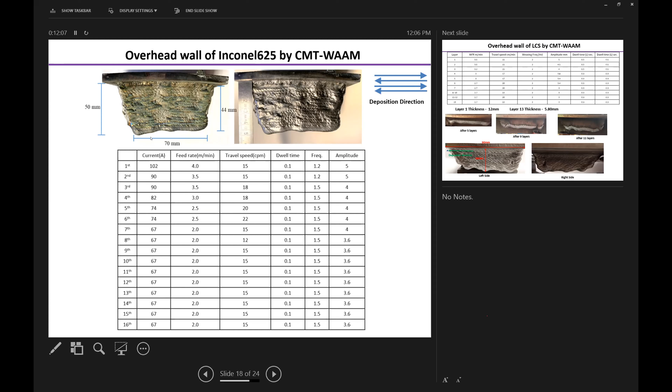So the issues we are facing in fabricating the overhead walls are: as the layer by layer deposition proceeds, the thickness of the wall gets reduced, because the molten metal is going to move downward or flow down due to gravity. And the second issue is the surface finish of the wall.

And the third issue is the reduction in the length of the wall due to the flow of the molten metal, due to melting of the previously deposited layer and backward flow of the molten metal. And the fourth problem we were facing was the formation of humps after 2 to 3 layers. So we are working on this.

So the summary of this preliminary investigation is that in case of overhead position, high surface tension force and a larger area of the previously deposited layer helps in placing the molten metal at the required position. The surface tension depends upon the temperature of the previously deposited layer. So the interpass temperature is an important factor in depositing the overhead walls.

In overhead wall deposition, we need to take care that the gravity force should always be less than the sum of the surface tension force and the arc force. So in order to achieve that, we need to reduce the wire feed rate as the deposition process continues. So the main controlling factors in this deposition are the wire feed rate, travel speed, and the interpass temperature. If we control these three parameters, then we will be able to deposit a wall of good quality.

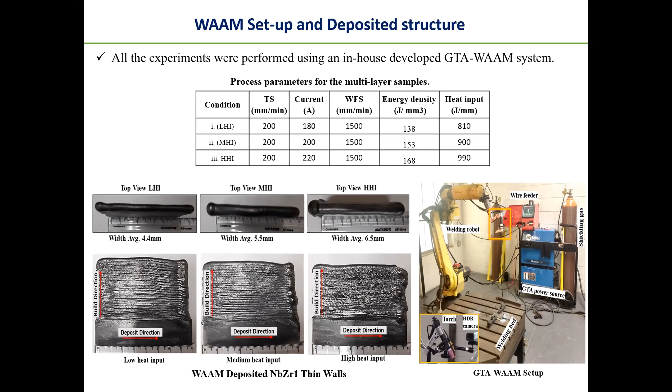After that, we did microstructural characterization. First we did optical microscopy to see the microstructure, which mainly consists of columnar dendritic structures elongated towards the build direction. This is very common in case of additive manufactured components, and we could not find any cracks or porosity in our structure.

Then we tried to do some EDS to find the elemental distribution of the elements. We did first area mapping, then line scanning. In the area mapping, we found the major constituent was niobium, more than 95%, with very small traces of zirconium and oxygen.

Then we performed line scanning to find if there is any elemental change in the dendritic or interdendritic region, but the line scan showed no major fluctuation in the peak of the pure niobium.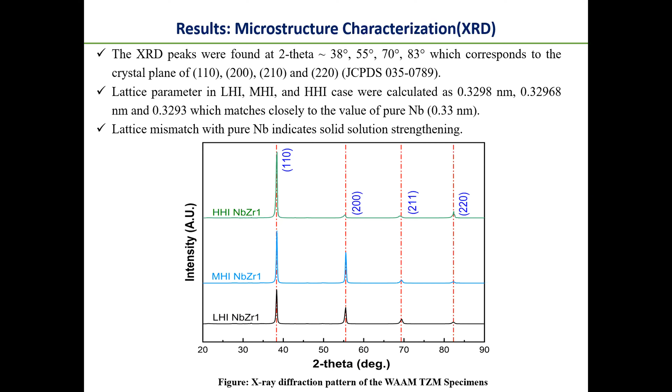The calculated lattice parameter was measured at 0.3298, 0.329, and 0.3293 for the low, medium, and high heat input cases, which very closely matches pure niobium. The slight change in the lattice mismatch also indicates solid solution strengthening, which is the major strengthening mechanism in niobium zirconium alloy.

After that, we measured the micro hardness from the bottom of the substrate to the top of the deposit at a spacing of 0.5 millimeter. There is an increasing trend in hardness value as the measurement height increased. This may be due to different microstructural changes or dendritic arm spacing.

There are some drops and peaks in the values, due to the layer interface and within the layer where the indenter was placed. The average microhardness value for the low heat input case was 175.8, medium heat input case was 169, and high heat input case was 191.19 HV.

For the mechanical test, we performed the tensile test in each of the conditions. We made 4 tensile specimens for each condition, 2 in vertical and 2 in the horizontal direction, all according to ASTM E8 standard.

We did the tensile test, but we could not find any correlation in the tensile strength with respect to the sample orientation as well as the heat input condition. Niobium zirconium is a ductile material. Most of our tensile samples failed due to ductile failure, but some of the specimens failed in brittle failure. This may be due to impurities in the component.

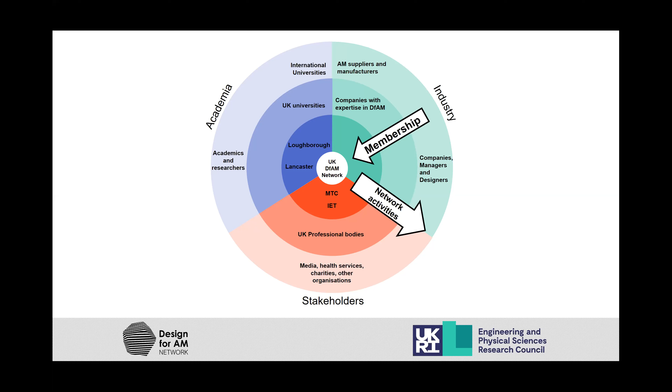The original academic partners - these institutions I'm sure will be familiar to many of you by name - are the most proactive within the UK in terms of additive manufacturing research, engagement and knowledge transfer. So led by Loughborough and Lancaster for this network, but others including Brunel, Nottingham, Sheffield, Leeds, etc. Bringing them together, we had their support to pull together the network and start driving this agenda forward.

We launched the network on the 6th of November 2020, right in the middle of what we didn't expect to be a very long pandemic. So everything started online, but that allowed us to bring in international speakers as well, and really bring together an excellent agenda program for that launch event, and start to create good dialogue between those that attended. So very rapidly, we decided to hold two development workshops at the end of November 2020.

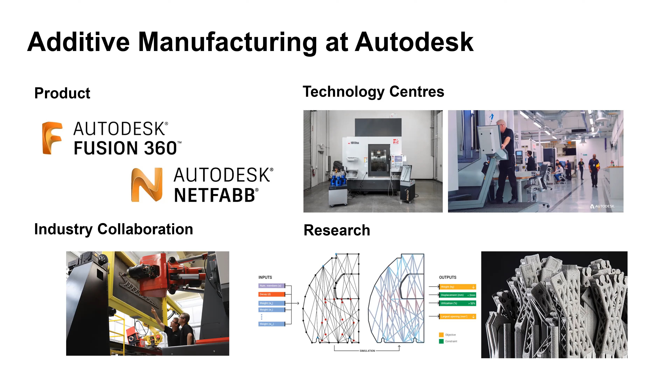So I want to focus slightly on one of those products I mentioned, Fusion 360. Today within the product, you're able to drive 3 main additive processes: fused filament fabrication, stereolithography, and selective laser melting. To support the selective laser melting capability, we also have process simulation capability, which enables users to see the heat input during the powder bed process, and also the distortion of their parts, which should give them prior warning to a build failure, be it a support failure or a recoater crash.

Now, all of these processes are 3-axis additive processes in their configuration, and I wanted to talk a little bit about some new multi-axis toolpaths that we've implemented into the product. So why is multi-axis additive of interest? Well, as we probably all know, most of the 3D printers we use day to day are of a 3-axis configuration. This has proven to be extremely accessible, I suppose you could say, in terms of its cost of equipment.

And also the ease of use of the equipment. There are also a range of free slicing softwares out there, and the combination of these factors has made the technology flourish over the past decade or so.

But obviously with this configuration, there also comes some challenges. We know that we need to support overhanging surfaces, which leads to significant material waste in support structures and additional post-processing time. We're only able to deposit onto flat build plates, so if we have stock of a different geometry that we wish to deposit onto or add features onto, we're currently not able to do that.

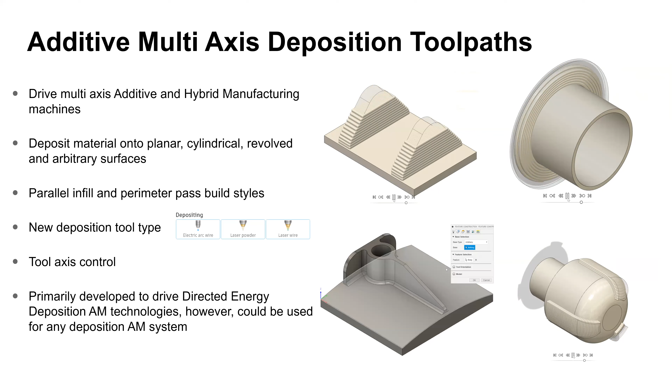You can also independently control the tool axis of your deposition head aside from the toolpath. What you can see from those clips on the right-hand side is the toolpath is conformal to the base surface we've selected. This technology is primarily aimed at driving directed energy deposition machines and hybrid machines, but with some modifications to the post-processor—the piece of technology that outputs machine-specific code—you could also drive other deposition technologies: plastics, concretes, large-scale machines, etc.

So I'm telling you this because I would love you all to go and try it. If you have the need for multi-axis toolpaths, or if you have an installation of Fusion 360, this capability will be available to you today. It's what we call a preview feature, which means you can turn it on in the preview features panel in Fusion 360. If you're associated with an education institute, Fusion 360 is free for you to use, so these toolpaths will be at no cost. We would love people to go and experiment with them.

Thank you, Robert. This brings us to our last topic, which we've called Additive Manufacturing Potpourri. Our next speaker is Andrew Gothard of Tennessee Tech University. His presentation is towards dynamic characterization of fully 3D printed capacitive sensors for footbed pressure sensing applications.

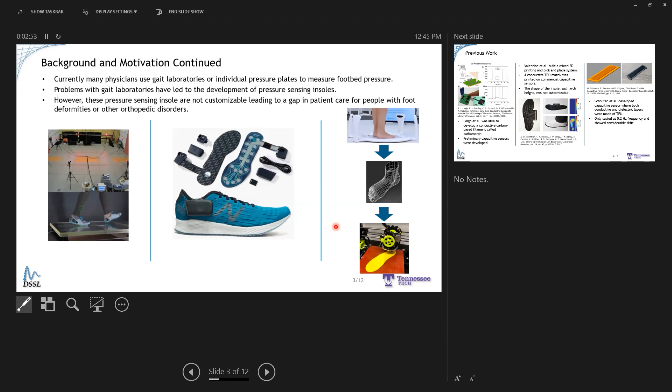So the idea behind this project is being able to scan a patient's foot and then create a customized pressure sensing insole in order for them to be able to get the pressure distribution map for their orthopedic doctor.

Some previous work done in this area: first by Leigh et al., who developed conductive carbon-based filament for pressure sensing applications and applied this to finger pressures. Valentine et al. took a similar but slightly different approach by printing a flexible TPU matrix on an insole and then using a pick and place machine to place commercial capacitive sensors into this matrix to sense pressures. While this could customize for size, it couldn't customize the shape of the insole.

And Schouten et al. was able to 3D print a fully TPU capacitive sensor, but these sensors were only tested at lower frequencies of 0.2 hertz and showed considerable amounts of drift.

So for this work, we focused on developing fully 3D printed capacitive sensors made out of conductive PLA and non-conductive flexible TPU, and then dynamically characterizing those sensors using a compressive load frame at various frequencies and pressure levels. We then evaluated how well these sensors were able to track the dynamic changes in pressure and quantify the amount of nonlinearity we expected to see in these sensors.

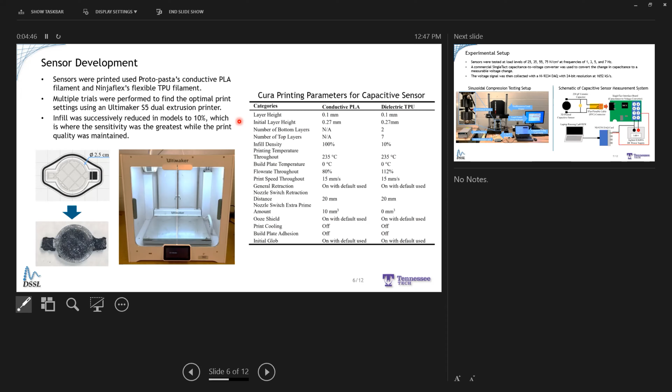In order to actually capture the signal, we used a capacitance to voltage converting circuit from SingleTact and an NI DAQ card running LabVIEW. Once we captured the signal, we smoothed the curves using a moving average filter. For each of the tests, we ran a 30-second test for each of the load levels and frequencies. For each of those, we wanted to assess the nonlinearity and get a calibration curve, so we extracted a single peak after the signal had stabilized to look at the calibration curve of those.

What we found was that the sensor was able to track the load levels and frequencies reasonably well. However, we did notice that there was variability in these signals, so we decided that these shorter 30-second tests were inadequate to determine the variability of the sensor. We also wanted to be able to quantify the nonlinearity.

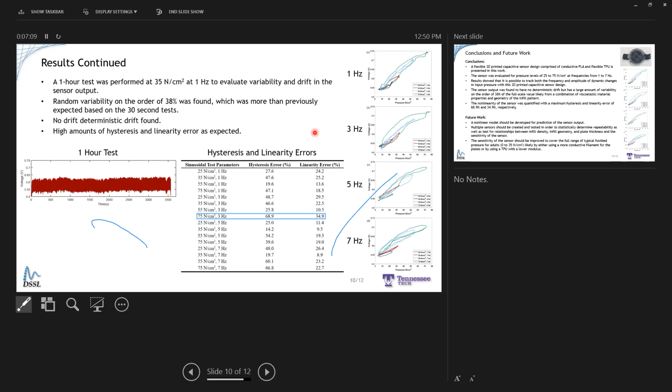Looking at the calibration curves and the nonlinearity for our sensors, it was highly nonlinear as expected from the materials. However, we wanted to quantify this, so we fit a linear model to each of these and calculated both the hysteresis and linearity errors, and found them to be a maximum of 68.9% and 34.9% respectively.

So overall for this project, we were able to create the flexible conductive PLA and TPU capacitor sensors and evaluate them at pressure levels between 25 and 75 Newton per centimeter squared and frequencies from 1 to 7 hertz, and found that they were able to track these dynamic changes in pressure with no deterministic drift. But we did see a high amount of variability, on the order of 38%, and a high amount of nonlinearity, with hysteresis on the order of 68.9% and linearity error of 34.9%.

Moving forward, we began testing and developing nonlinear models to help with the sensor's prediction output. We've also been moving towards printing multiple sensors to determine the statistical repeatability for these sensors, and then testing for things like infill density and infill geometry and its relationship to sensor sensitivity.

And finally, in order to get to that goal pressure range of 0 to 35 Newton per centimeter squared, we are testing different filament types to see if we can get a lower modulus to help increase the sensitivity of our sensor. So thank you, that's my work.

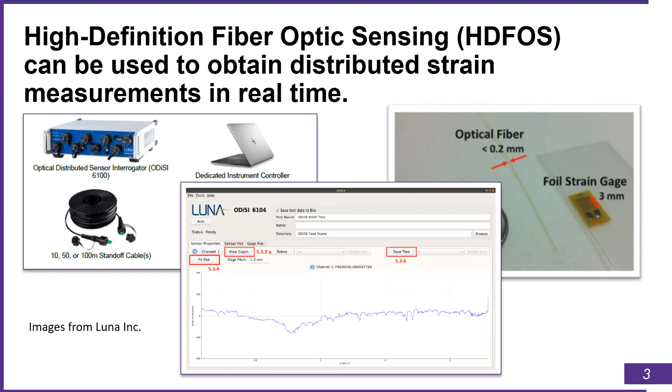Now Tyler's going to describe how he went about the design process.

With the beam dimensions, we decided to go with 18 inches for a couple of reasons. We wanted students to be able to see this clearly, so we didn't want it too small. Also, with the Luna equipment strain sensors, the smallest sensor they have is a 1 meter fiber, so we needed the beam big enough to embed the entire fiber. The depth also depended on the bend radius of the sensor, so we needed it large enough to accommodate that.

With the material, we also wanted low stiffness so the strain could be seen clearly. If it's too stiff, students looking at it won't see very much, so we wanted the strain to be substantial under these small loads.

We also went with a W-shaped beam, also known as an I-beam, because it's something students are familiar with in mechanics classes. They see it quite often, so we wanted it to be recognizable.

For material selection, we chose PETG. PLA is very commonly used and good for most applications, but for our project it would probably be too stiff. We decided PETG would have a good combination of strength and flexibility to get that strain, like I previously said.

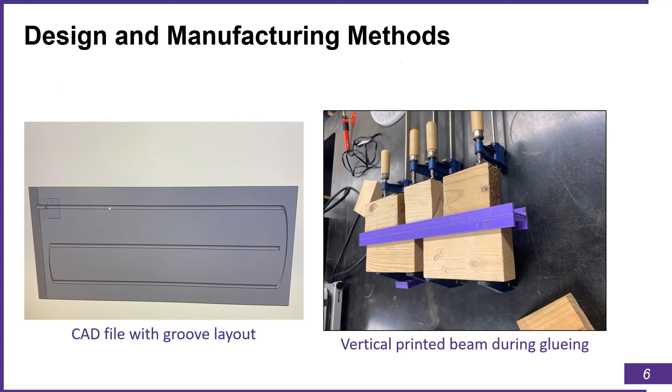Now we're going to show you just a few results of the beam in action. This first one is just going to be a video. There's no sound, I'll talk about it a little bit as we go. It's not perfectly synced, but I think you'll get the idea.

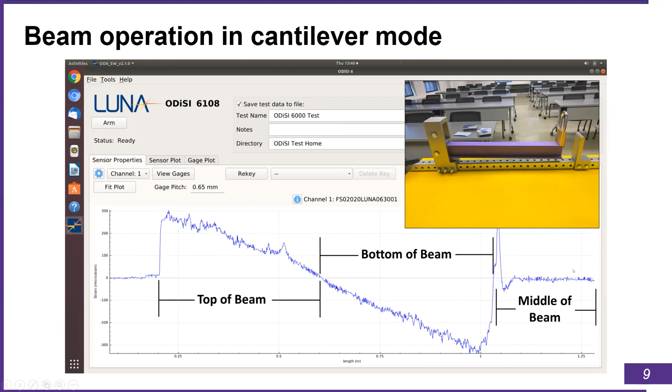So just to summarize what we talked about, we had manufacturing challenges. Obviously with the vertical print, when it gets really tall, it's hard to maintain the alignment. That was an issue we found, and we worked around it by adding supports. With the horizontal print, the size of the printing bed is an issue since most are not as big as what we needed them to be. We also found that the PETG tended to clog more, especially with the stacker printers.

It ultimately ended up being unsuccessful, but we know it is possible to do a horizontal print, it's just overcoming those challenges. The fiber optic installation was actually probably the easiest part of the project. Actually getting it in there was seamless, it worked really well, and good bonds were maintained in the project.

We obviously wanted students to visualize and interact with this strain, so it's a pretty easy setup. You can actually take it into a classroom and set it up really easily and quickly. Having these in mechanics and structural engineering classrooms just helps students really see what strain is and understand it.